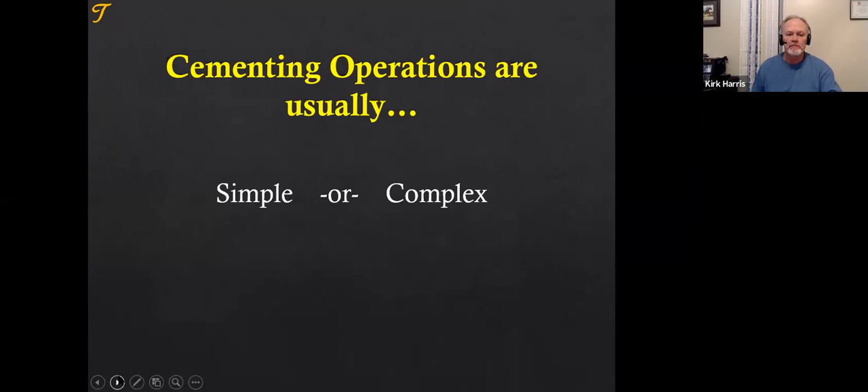When I was preparing for this webinar, we could do a 6-month webinar on operations. There is so much to choose from. It was difficult for me to determine what to focus on because this operation is complex. We're going to show some simplicity tonight, except it is complex. Usually, cementing operations are usually similar or different as you go around the world.

Vahid says different. Natalie goes with different. Not only are they different, they can be very different.

I've had the opportunity, I was looking at how many countries I've been on a cement job in. For those who don't know me, who haven't attended a webinar, my name is Kirk Harris. I worked for Halliburton for 23 years, then went to work for Occidental Petroleum as their global advisor, and then Talisman and Repsol as their global cementing advisor. I now consult in bond log interpretation, cementing consulting, a little training, and product development with our company Thuraban. We get on and talk every few weeks on our regular webinars.

When I started with Halliburton, I started as an engineer in training, but I quickly became a cementer and went out and used the equipment and cemented wells. I'm not speaking today from a theoretical standpoint. I was thinking as I went around the world, how many different countries did I cement in or supervise cementing operations on location. Although I've engineered in more than 40 or 50 countries, I've been on site in about 15 countries, from remote jungles or remote geothermal wells in northern Sumatra to deep water in Indonesia or the Gulf of Mexico, to downtown Los Angeles, cementing wells in the middle of a city.

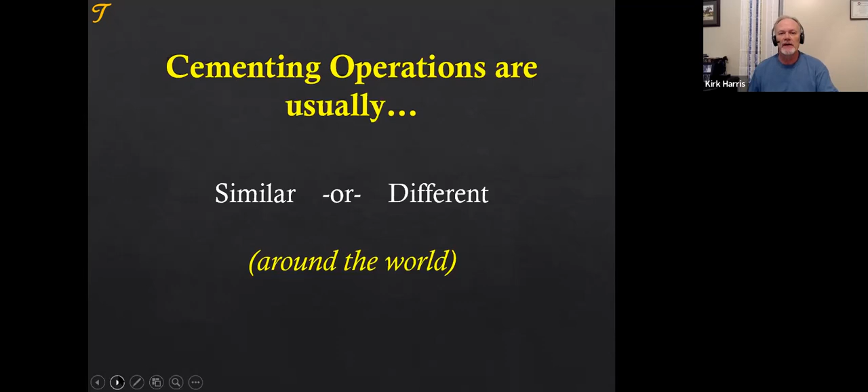Wherever you go around the world, from the Bass Strait of Australia to the West Texas area, it is different. That's so important, and we're going to talk about that - the local practices that are very important. As a global advisor, we put out global best practices, but those have to be refined and targeted for areas to get good cementing operations. So they're very different. I'm anxious to hear tonight some thoughts you have about how you do cementing operations in your area. And finally, cementing operations usually vary from place to place.

Are they getting better or getting worse?

Okay, Natalie says better, and we're going to have to believe her. I hope they are, I hope they are. Again, from area to area, both service company and operator do things differently. Some are better, some are worse. But generally speaking, with new technologies and lessons learned, hopefully we're getting better.

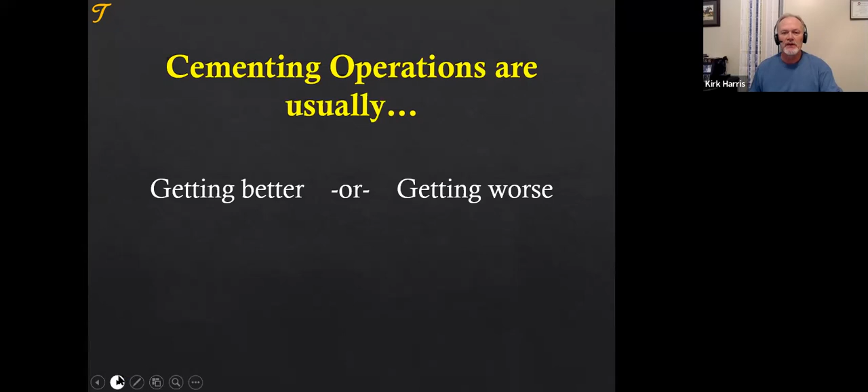Well, thank you for taking that quiz. The agenda for tonight: I'm going to give a short introduction about concerns - concerns that maybe you haven't thought of. I think about these, and some maybe you have thought of.

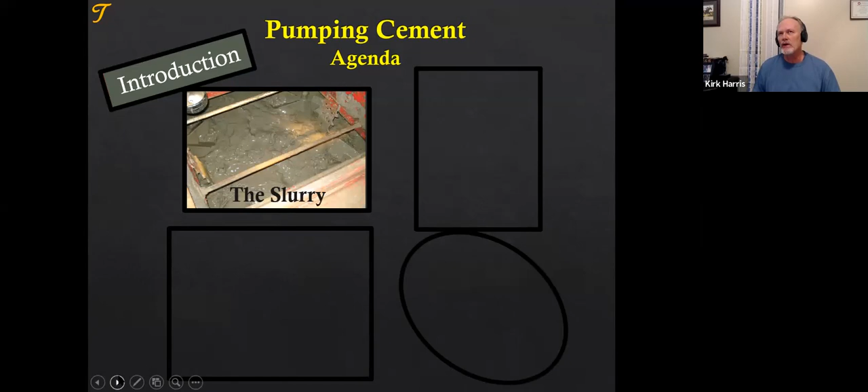I want to talk about 4 areas of pumping cement, and the concerns that you have. We'll talk a little general knowledge about each of these areas, and we'll focus on the major concerns. The first will be the cement slurry - the mixing of the slurry, the preparation of the slurry. On location, we want a quality slurry to be pumped down hole. Be thinking about what are my concerns when I go to a location about the slurry.

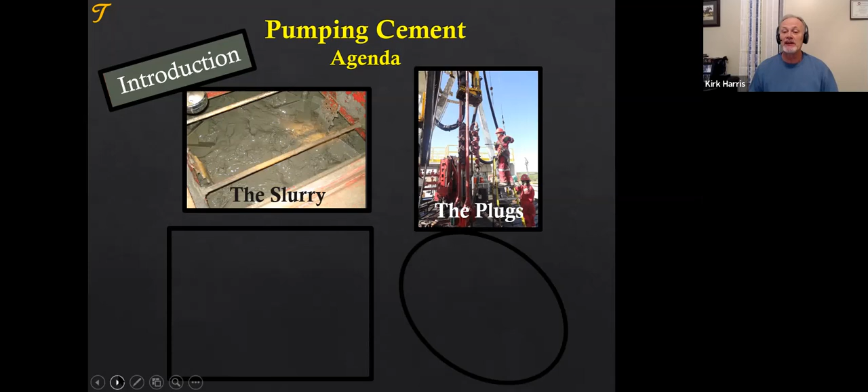Then we'll talk about the plugs. We pump slurry, usually preceded and followed by plugs, and there's a whole lot of things around the plugs that may give us concern.

The equipment - we place that slurry at high pressures and displace it at high pressures. We use a variety of equipment, both on and off location for the operation. As we prepare and go to location, what are your concerns about equipment?

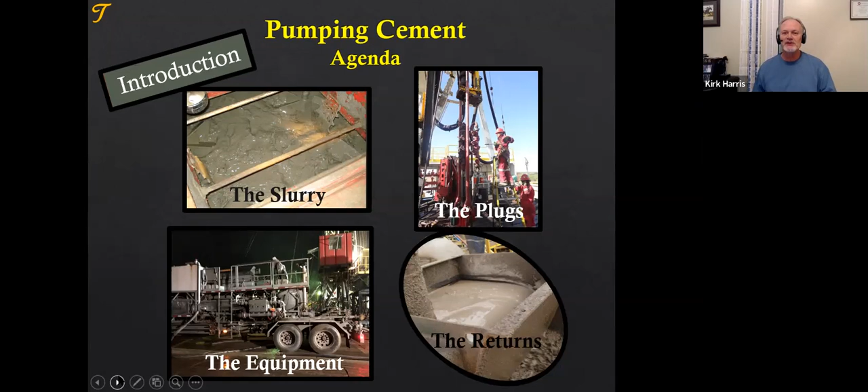And then finally, an area that I like to spend time with - the returns. I've got a terrible story to tell about the most recent cement job I was on. I'll just say in short, we got a lot of cement in the mud tanks, and that's not good. We brought the expert on location so we could fill a mud tank with cement. I'm going to make this story very short, and maybe throughout the webinar I'll even forget to tell it, and that will be good. But what are your concerns about the returns besides pumping that cement into the mud tank?

Another question: in a line or two, what separates a good operation from a bad operation? We're thinking cementing. My other passion is horse racing - I train race horses, and I've talked about this quite often: what is the difference between a good horse racing operation and a poor horse racing operation? The same, I see it with cementing operations. In a line or two, in a word or two,

what separates a good operation from a bad operation?

I'm looking for the answers, and I hope you're joining me with your cup of coffee. As an aside, I was watching someone give a presentation on TV the other day and they kept drinking their coffee, and it actually annoyed me a little bit. I thought maybe I better stop drinking coffee, so I didn't drink coffee this morning. Someone said, we want to see you drink coffee. So I'm going to drink my coffee, but I realize it may annoy someone, because if I were you it would annoy me. I'm giving you the chance to answer the question while I sip my coffee.

Now, it says to provide zone isolation. Yes, but as a company, just as a company, getting out there and being able to pump the cement to do that.

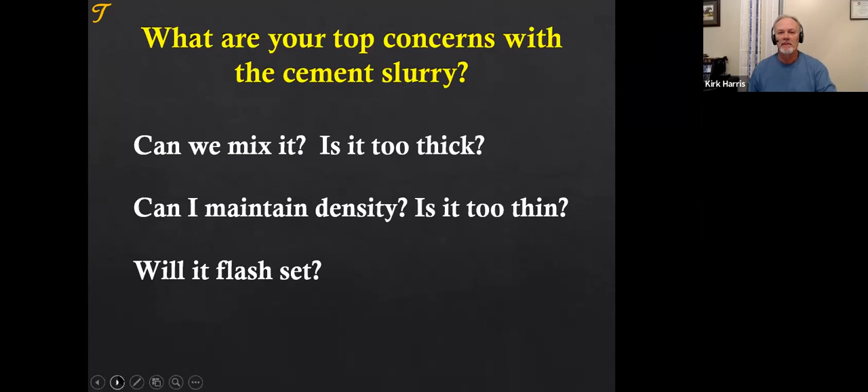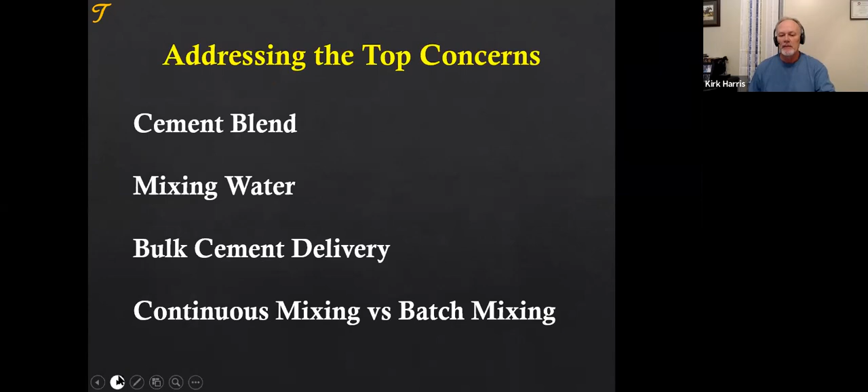So as we address the slurry and the big concerns, it starts here. It starts with the cement blend, then we look at the mixing water, the delivery, and then we'll talk about continuous versus batch mixing. But it does start here, far from location, in a place near and dear to my heart.

It is the bulk barn. This is where I started. This was my first duty when I started for Halliburton. My first job was to cut sacks of additives, put them in the hopper, open the valve, and allow the vacuum to put them and layer them on top of cement in the scale tank as I prepared the blend to go to location.

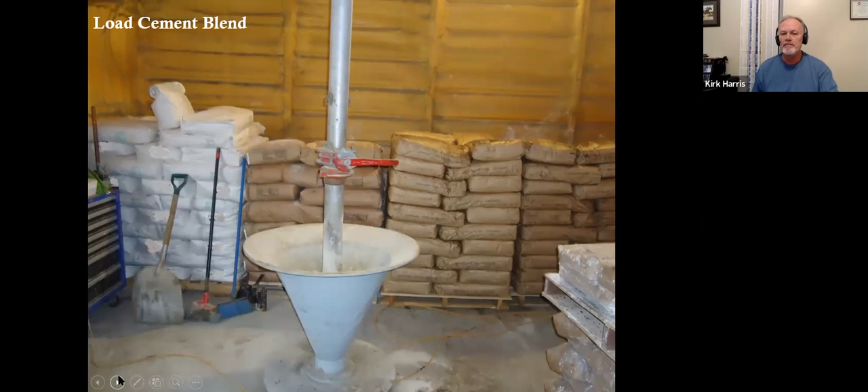Here we have preparing the blend into the hopper. This is a super sack. I think it's 1,000 pounds of hollow spheres, cenospheres, hollow pozzolanic spheres. You can see where it's made.

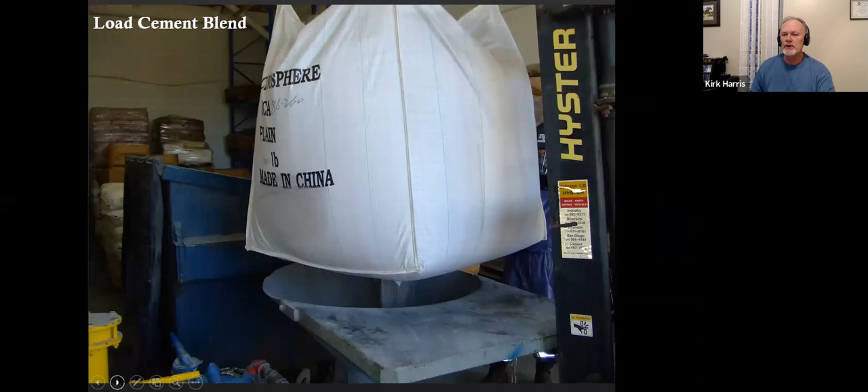Those go into the hopper. They're blown into a scale tank. We put the cement into the scale tank. We layer cement, then additives, cement, additives, cement into the scale tank. We weigh it out. We then blow it back and forth. 1, 2, 3, and 4 goes to the truck.

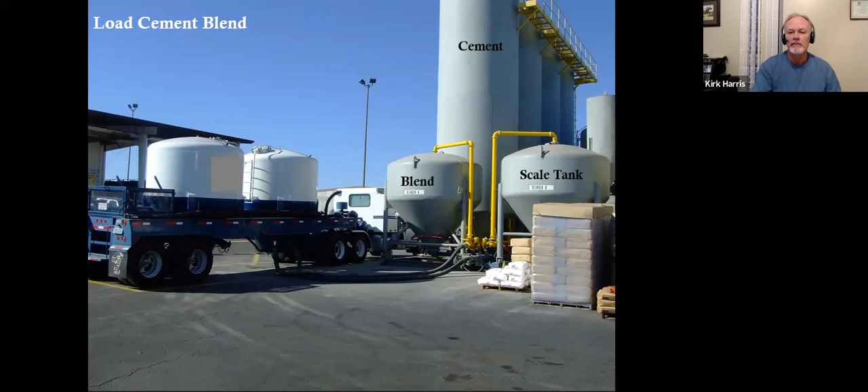We'll have to do this several times to fill a truck or on location to fill a silo. While we're doing that, as it goes to the truck, we're going to catch a sample. We have an automatic sampler that takes the sample out of the middle of the stream of cement as it's pneumatically transferred to the truck.

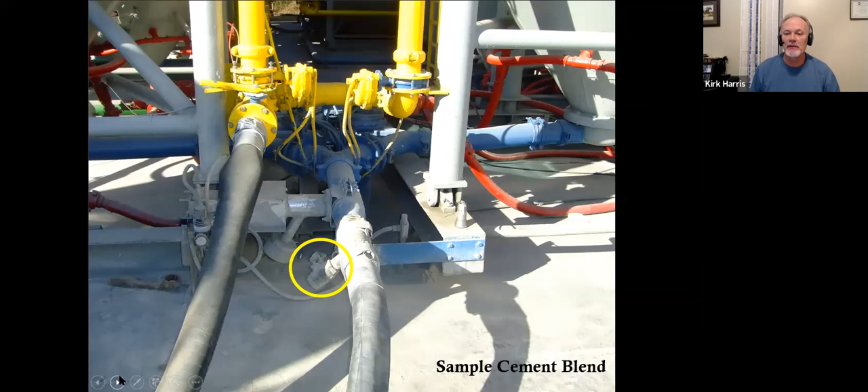On this particular day, actually, the sampler was not working. I don't know how long it had not been working. And so there's a ball valve there where you may be catching a sample, representative or not, it's a sample. We're going to take that sample in a plastic bag, store it, and keep an eye on it. And we're going to run a blend test with some of it.

When we run a blend test, I'm not sure how you run it, but I know a blend test is run differently all over the world, because it's some task to test every single batch, since it takes several to fill a truck or a bin. Sometimes we sample every one and test every one. I know some operations that do that, and it is attention to detail, but boy, is it a lot of work. And it ties up the lab.

You can take it from just one load. I don't know what good that does you. It does you some good, but with one load, you take the sample, you could mess up all the other loads and it'd be a disaster and you'd never know it. That's happened to me before.

Or you can take a little bit from each load and do a composite blend test. Often we'll do thickening time tests, so we're talking more than 4 hours where we're waiting. The bulk truck sits in the yard. We've had, in busy times, traffic jams in the yard because we're just waiting on blend tests, causing all sorts of logistics troubles.

Or some service companies had the idea, I don't know if it's good or bad, to be honest, and that is: send the truck to location, and we also send liquid retarder, and we make sure that we design with not enough retarder, and then we add liquid retarder and adjust it during our blend test. I know one region that does that all the time. They sell a lot of liquid retarder. I think they run a lot of liquid retarder. That's my concern.

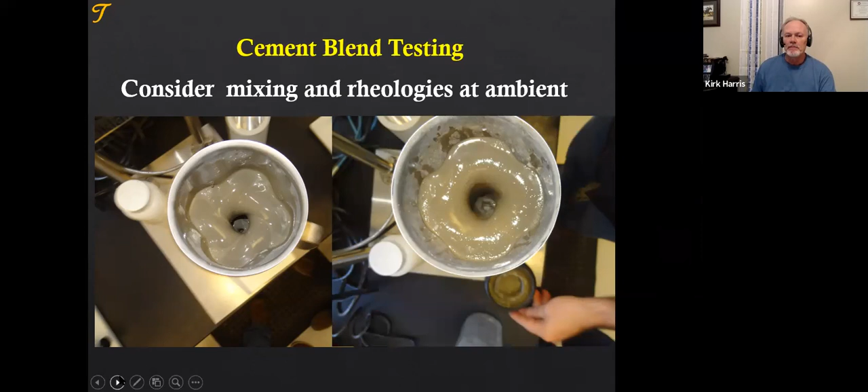Often when you have something wrong, it will show up in the viscosity. So they mix it, and you can tell on the right what's a pretty good cement. The blend test, we're getting all sorts of lumps and problems. So we know something's wrong and we can check it out there.

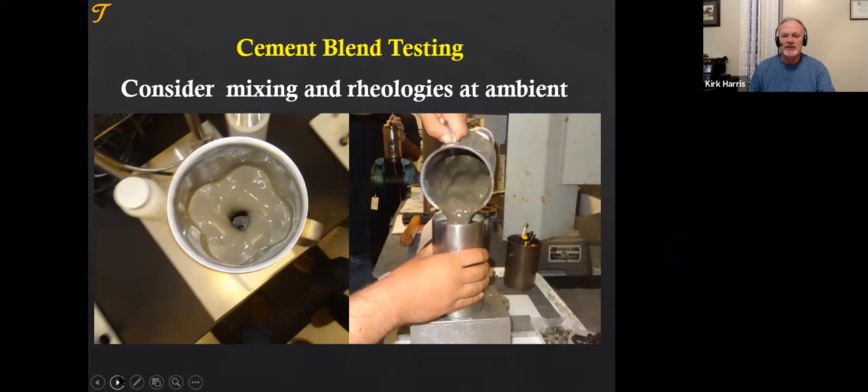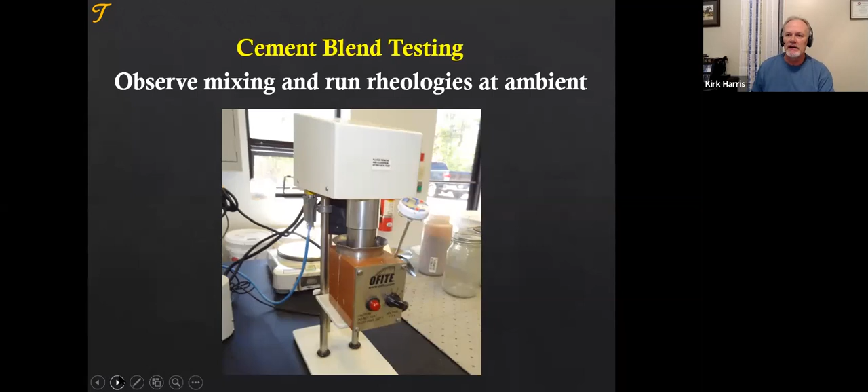And we need to gather that either as we transfer to the boat or as we go out and get the cement, bring the cement in from the rig. Because sometimes the cement's sitting out there for a long time and it can cause some big problems.

Understand again, we do it differently everywhere. In the Gulf of Mexico, we will have dry additives and liquid additives, but a lot of dry additives mixed in the cement that goes onto the boat at times. In the North Sea, all around the world, mainly the only blends we put out there are silica flour blends. And then we have neat cement, and all additives that we use are in liquid form.

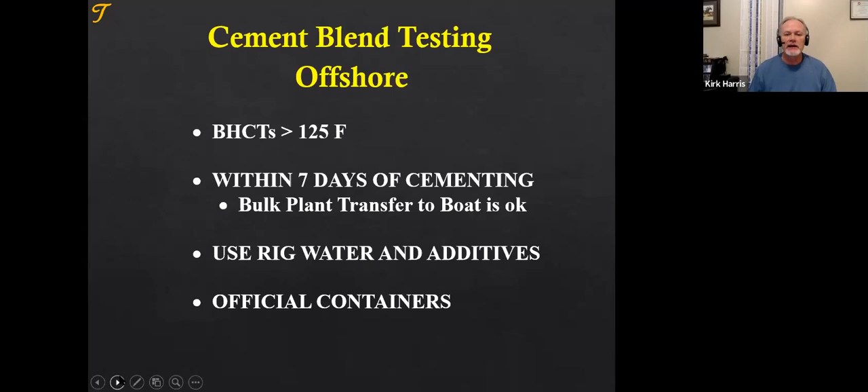The mixed water, someone mentioned that. Once again, it's very local. In the north, in cold weather, we have to heat the water. Cold water makes very viscous, difficult to mix cement. I put 70 to 80 degrees for one region. We had it narrowed. We're going to heat the water between 70 and 75.

In West Texas in the summer, some people use less than 90. I'll use less than 95. We don't want the water to be too hot. We did a major study which showed that it only affects accelerated slurries. So if you have a slurry with retarder, the water can be hotter than that and you're okay. You don't have to shut down the job, but water temperature is the main concern.

We test chlorides, we want them less than 3,000. Above that, we see the acceleration of the cement. We'll check pH, we'll check specific gravity, dissolved solids, sulfates, and some other properties as well. From region to region, we test different things. But these are the main ones.

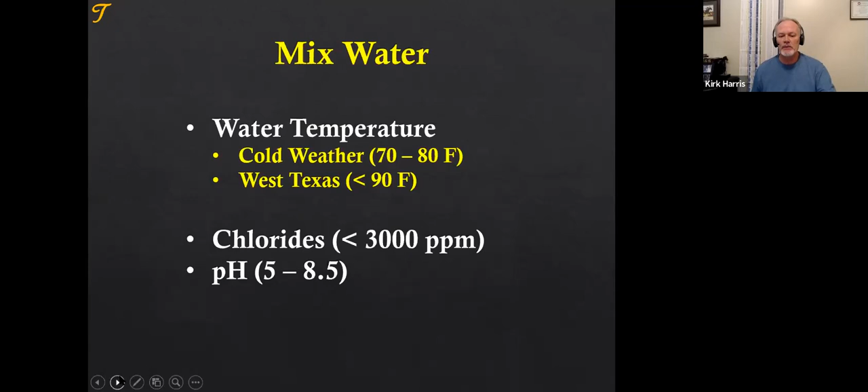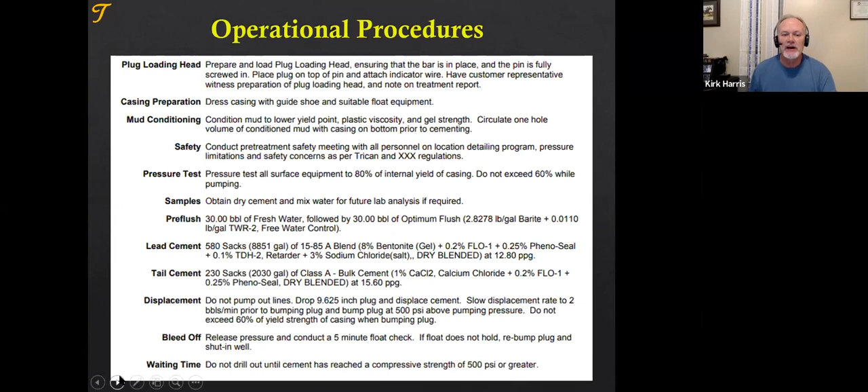I'm going to skip, but we are doing calculations. We are looking at our operational procedures. I hope they are more detailed, and I hope they're a partnership between the operator and the service company. We covered this in our first webinar, so I'm going to move through that, and let's go right to location.

That bulk truck is now on location. We have our water truck there to the left, the black water truck. And I don't know who the blue is. There's a few blue companies, so you don't know who this is. You'll notice that we have a ball valve and we're transferring pneumatically the cement through the hose to the cement truck. We're going to take a sample here as well.

We're on a job where we're supposed to mix the cement at 16.4 ppg. On location, we couldn't get above 14 ppg. We had to abandon the job, and fortunately, we took a sample of the cement from the ball valve. When we got the sample, it was brought into a lab in New Mexico, and I looked at the sample and I said, wow, this isn't our cement.

It had lost circulation material in it. We didn't order lost circulation material. And it was very evident to see little pieces of plastic were in the cement. So we went and said, you loaded the wrong cement. And they said, no, we did not. Here's our cement that we loaded. I said, well, you had contamination in your truck. No, we did not. We checked it. It was clean. And I believed them. Where did the lost circulation material come from?

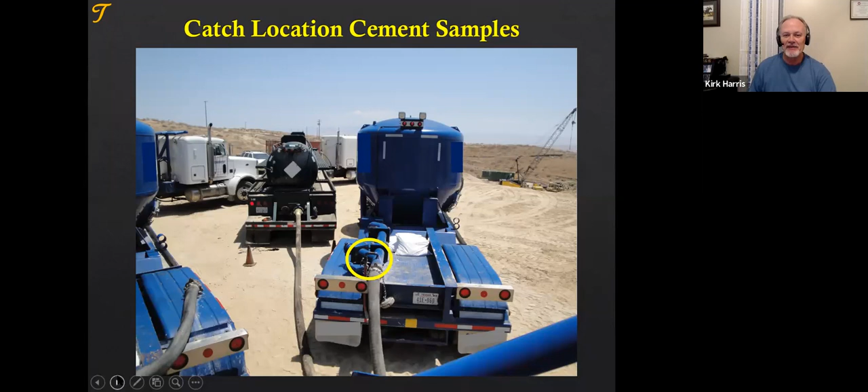That's why we need to sample on location. That's one reason why. Some service companies have taken away the valves to sample. So if nothing else, reach in and grab some out of the line, get some evidence just in case things happen.

Here's where the cement goes to. There, the valve on the left, you see dry cement going in. For all of those big red fans, this is not a Halliburton cement head, this is a different company. Dry cement goes in, you see the H2O. It will be in a jet form, either axial or rotating, and it will wet the cement and it will fall into the mixing tub.

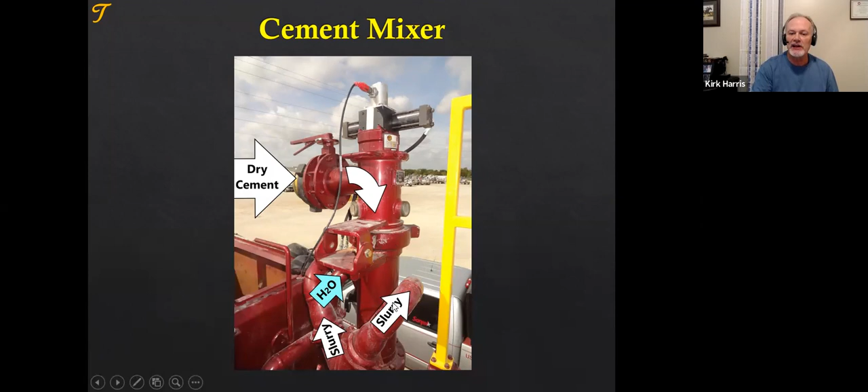Here's where the energy occurs. It then goes into a containment and it is recirculated. So you see the slurry coming back in. So all at one time, you have dry cement, you have water jet, and you have recirculated slurry. And we end up with the mixing tub. I'm not saying this is pretty cement, but it is gray.

On the left side over here, that's the pre-mix side. This is where we're going downhole. We have agitation. And this is where we look and see, is that quality slurry, can it be mixed or is it too thin? If you ever have a thermometer as well, it's pretty handy. Sometimes you can kind of touch it, be careful, to see if it's warm.

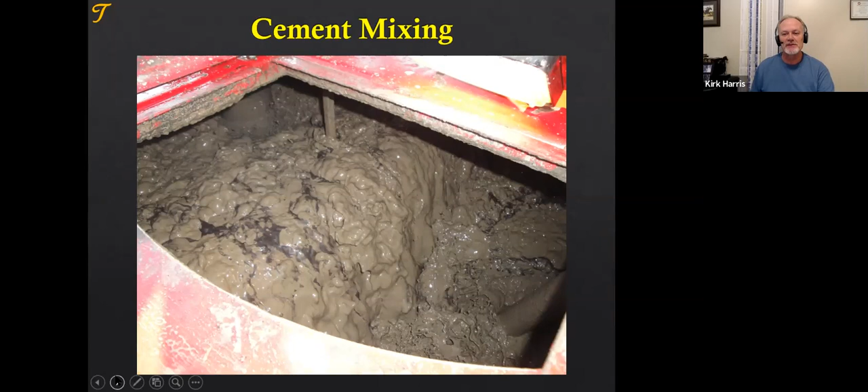I've been on operations where we've pumped some very hot cements and I've been very curious about that. Here we are mixing some more cement. This is pretty close to downtown Los Angeles. We're mixing cement here in the tub. We're going to confirm density.

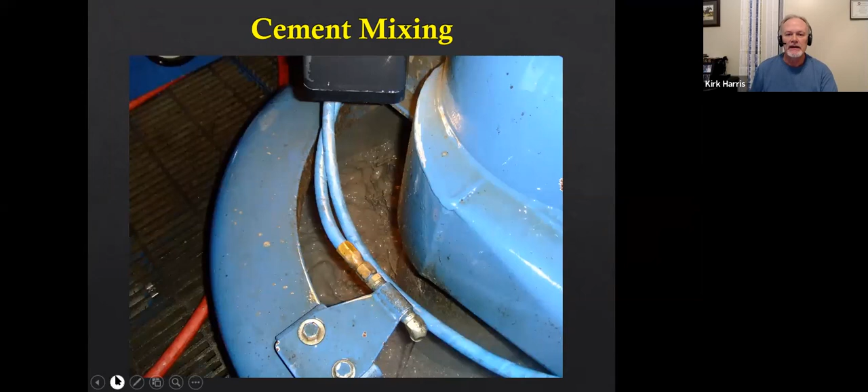Once again, the last job I was on, we did not confirm density. I was going a little crazy. But at the beginning, in the middle, and at the end of a continuous mix, we'll check the density. It's easy to get the cement up to density, check it.

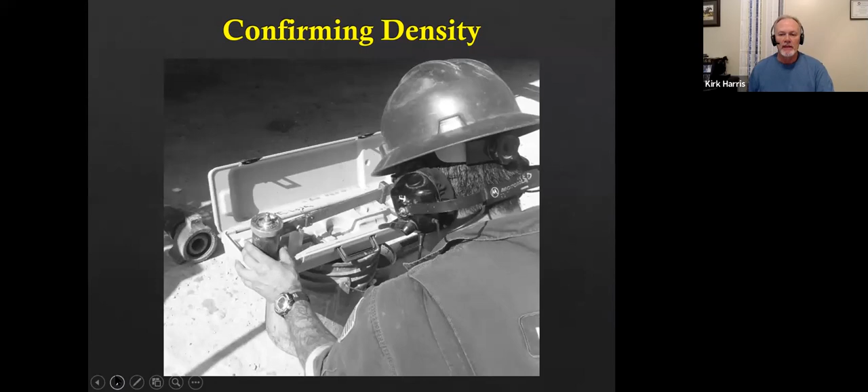We calibrate our densometer at that time and then just trust the densometer. But we want to see it at various points while we're mixing, confirming that our density is correct. We also check it electronically with the densometer. You can see here the density. We want it to be uniform.

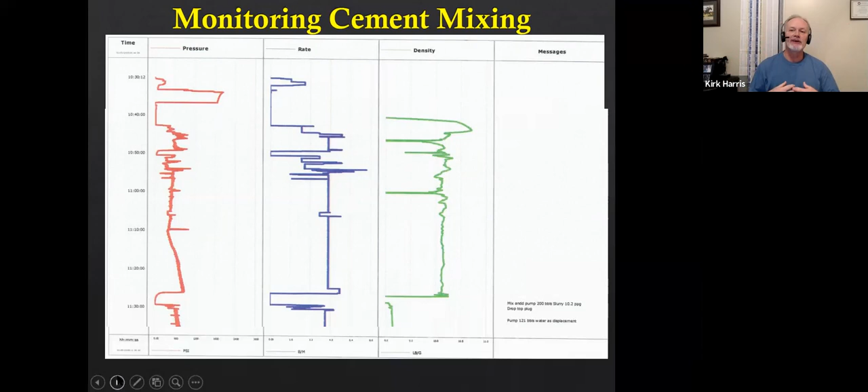The cause for that so often is getting cement to the unit. Once you start having problems packing off, or you're having problems getting delivery, it continues as an issue. These bulk trailers have aeration pads on the bottom, and we fluff the cement. We aerate the cement before each job to get it to flow, but it can still pack off. You can still get surges of air, which cause problems. I think you can see a surge of air here, a surge of air.

And we have someone tending that bulk truck, the bulk driver. What is he doing during the job? What is he continuously doing? Someone this morning said taking it easy, but he is not taking it easy. What is he doing? He will be opening and closing the valves as we go from pod to pod of cement, or from silo to silo.

What else is he doing continuously? It's a skill, I don't think I'm good at this skill. What is he doing? I'll give you a few seconds to answer. He is opening and closing valves, but what else is he doing? If you're on the cement job watching him, we have a compressor that's running continuously, keeping a constant pressure. He's looking at that pressure.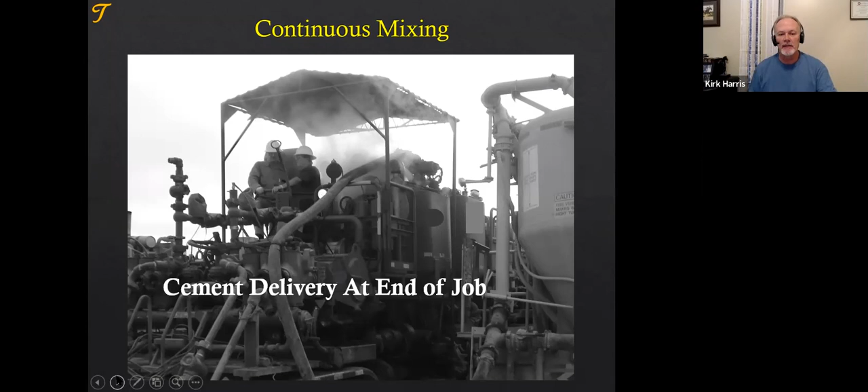For those reasons, we often will batch mix. I work for someone right now and I agree with him, because he's been on so many jobs and he cannot get a good continuous mixed job. Go back to whether things are getting better or worse. And so he will batch mix all tail cements and all critical cements.

Batch mixing, instead of mixing on the fly where our retention is about 8 barrels, and as we're mixing, it's being pumped down hole. Batch mixing, we mix all of the cement before we start pumping it down hole, and we keep it in these containers. This is a 250-barrel container, or 100-barrel batch mixer, so we can mix.

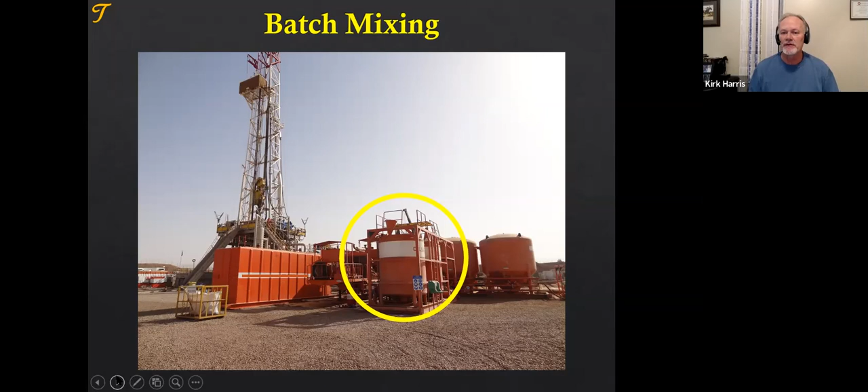And here we have some beautiful cement in the batch mixer. I remember this job, this is actually beautiful cement being pumped in Oman.

Now, what are some concerns about batch mixing? First of all, what is a good concern? What is good about batch mixing? Why do we love batch mixing? I know we don't have to worry about the way it mixes, but what does it give us?

Natalie mentions considering the effects of batch mixing on thickening time. We simulate it in the lab, I'm not sure it really counts so much as we simulate it in the lab. But what are we trying to get out of batch mixing? Exactly, we're trying to get a uniform, constant density slurry. We don't worry about it here, it's a beautiful slurry, let's pump it down hole. Much better control of the density. What is the concern about batch mixing that you need to be aware of?

I don't know if for any of you, this is the first webinar you've attended, but you're saying, man, he asks a lot of questions. Doesn't he know anything?

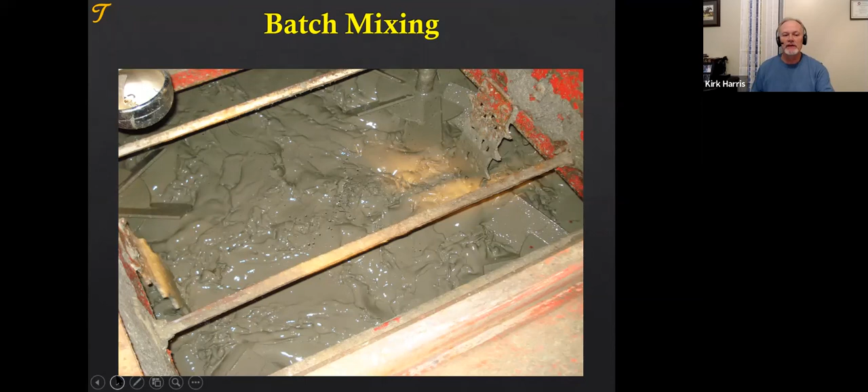Here are some other concerns, these are good points. Here's a big one, and that is fast setting cement. I don't know how many batch mixers I've been involved with that I've cemented up, but it's been quite a bit. I was sent a picture from the North Sea of a batch mixer where a cutting torch had taken off a side of the wall, and carved in the cement were the initials of our field engineer. He sent it and said, thanks a lot for the design recommendation, Kirk. And here's a beautiful picture of a cemented up batch mixer. The problem is you can get friction and heat retention.

Cements are exothermic reactions, but if you get heat in the cement with a large mass, it can get pretty hot if you have an accelerated slurry or friction involved. Heat retention in large volumes, I don't think we mimic that well in the lab, is an issue. Large jobs we have 100-barrel tanks. If you're going to put 2 or 3 batch mixers out there, the footprint and the cost are involved.

So we usually use it only for small volumes of fluid. Although for the large volume jobs, we do this for hollow sphere cements. You can use it as an averaging tank: fill up 50 or 100 barrels of cement, pump that down hole, and while you're pumping down hole, you continuously mix into the batch mixer.

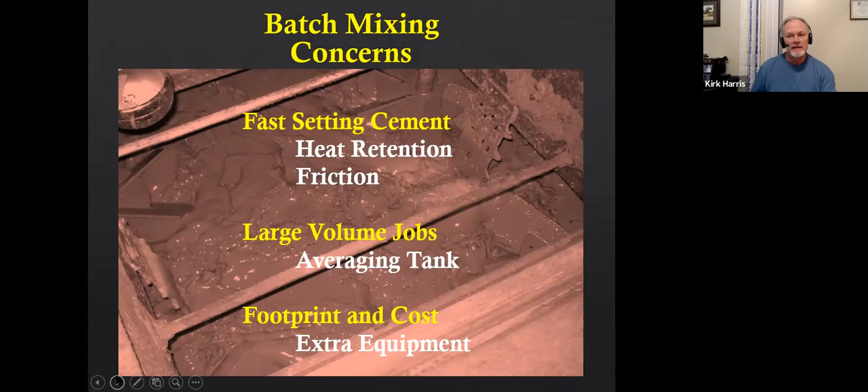We'll move to the plugs. My question to you, another question: what are your top concerns with cement plugs? Again, the big concerns when you go on location, when you're dropping plugs, we'll look very quickly at the basics of dropping plugs, and then we'll look at some more cutting edge technology.

What are your top concerns with the cement plugs? You're on location, you want things to go well, that you have the right plugs, the depth, where do I have to pump these plugs. But what are your top concerns? Usually my top concerns are what can go wrong. I want things to go right. What can go wrong here?

That you have the right size of the plugs. Do I have the plugs on? Now listen, do we even have any plugs on location? That concern usually is quickly alleviated, but sounds like a bad experience there not having the plugs on location.

Yeah, do I have the right plugs? I look at it this way: will the bottom plug open? Was that bottom plug actually a top plug? If it's a top plug, we're in big trouble. If you ever have had, and I have, the bottom plug not open... I've had subsea release bottom plugs, and subsea release plugs are a whole nother issue. We'll look at that a little bit.

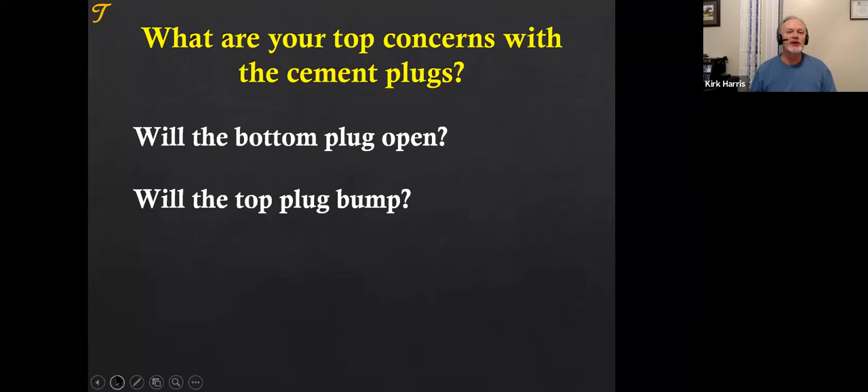Just a little bit until we tag the next day and find out where that cement is.

Here's one of my concerns. I remember the first time I had to go up and stab a cement head about 25 feet up in an ice storm. I remember how long it took me to climb up the ladder with no safety harness. We didn't use safety harnesses there. We climbed up in the sky trying to stab difficult to stab cement heads. So I'll say it maybe one more time: maybe things are getting better.

In the cementing world it used to be much more dangerous. But how much trouble will we have stabbing the cement head? Because after we circulate, sometimes we'll put the cement head on and circulate some more, sometimes we won't, and we'll do the cement job. How long does it take? When I'm on location, I don't like waiting while we try to get this operation going while the mud is static. We want to circulate and very quickly then cement.

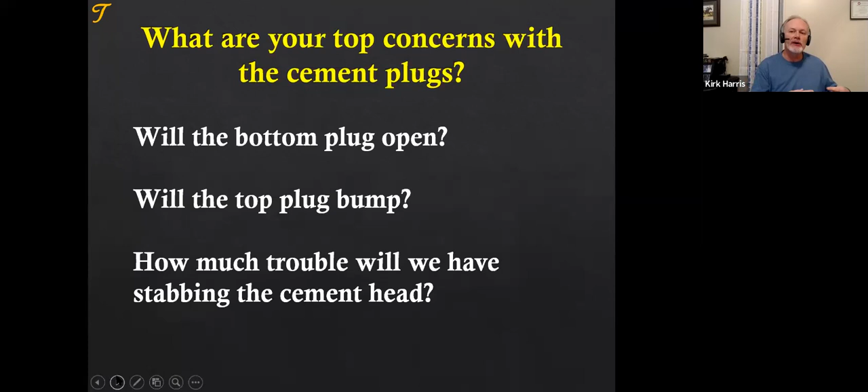Let's look at plugs very quickly. To the right is the top plug, a solid plug. To the left, usually red, not always. A little side bit of information: the color of the rubber is actually, I believe, red. We have to color them to make them black. I didn't know if you knew that.

But the bottom plug, that top disc will burst, this particular plug at about 250 PSI. So when it lands, it bursts and we cement right through the middle of the plug. When the top plug lands, it is over, the job is displaced. This is what we use on long laterals in unconventional wells. We use this quite effectively. A key there is to make sure you clean the casing all the way out.

When we complete the well, we want to circulate all of the debris out of the well, dynamically settled barite or cement, and we would circulate a bunch of trash or debris out of the well. When we went to using two bottom plugs and this top omega plug, a regular plug, but then a large wiping ball on top of it, we got very good results.

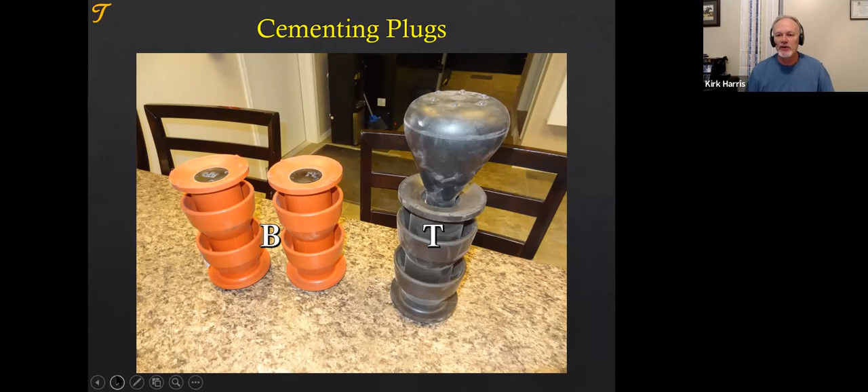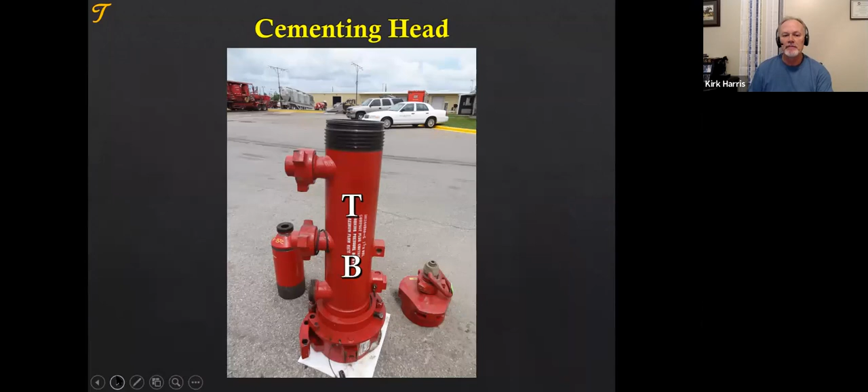Here's the cement head that we will put the plugs into, the top plug T and the bottom plug B. You can look down in that cement head and see our bottom plungers that will retract to release the plugs. So we have our top and bottom plug.

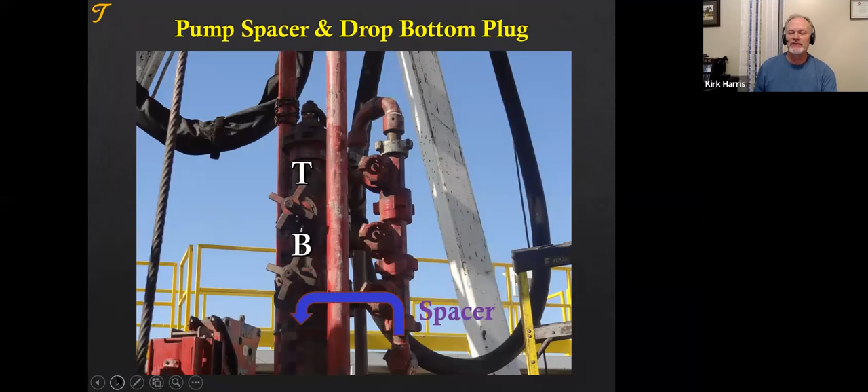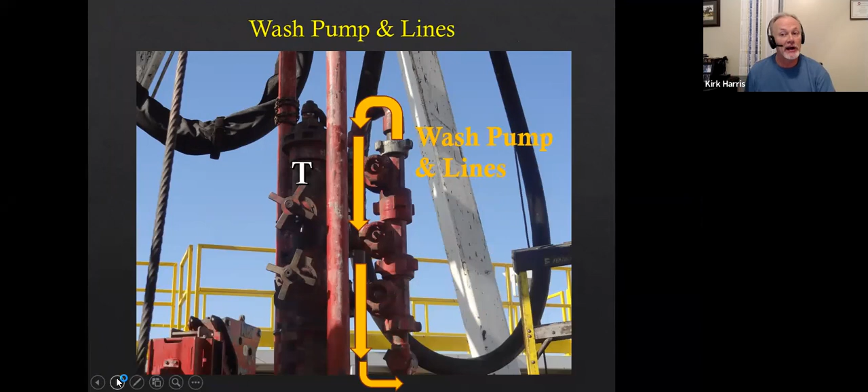We'll pump our spacer through this double plug container cement head. We'll then launch the bottom plug with cement, pump all of our cement for a production job. We'll wash the pumping lines to make sure that we don't get too much cement on top of the production top plug. And then we'll displace and launch our top plug and displace until it bumps on the collar.

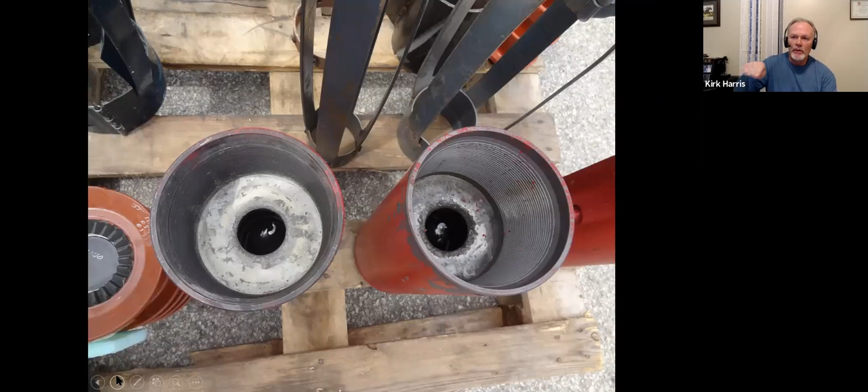We kind of introduced cementing through the top drive. Many years ago, we used to cement through the top drive and we would drop the plugs by hand, and oh, do I have some stories to tell about the dangers of dropping plugs by hand in the middle of a cement job. This is another way, as we cement through the top drive, also with the casing running tool and a swivel where we can quickly run the casing. We'll be able to rotate while we cement and we launch plugs.

I think the only jobs for this plug launcher so far have been in Australia, the case histories are in Australia. There are other systems like this, but I wanted to present to you some new technology, and this kind of stuff to me, I like this quite a bit. So let me show it to you.

First of all, let me quiz you: can you see on your screen the Volant plug launcher? I don't want to show you it and then you tell me we don't see anything. Okay, great, I'll hit play. Let me first add a little sound and a little optimization, and away we will go. Okay, we'll just take a look, I think you'll be able to see it.

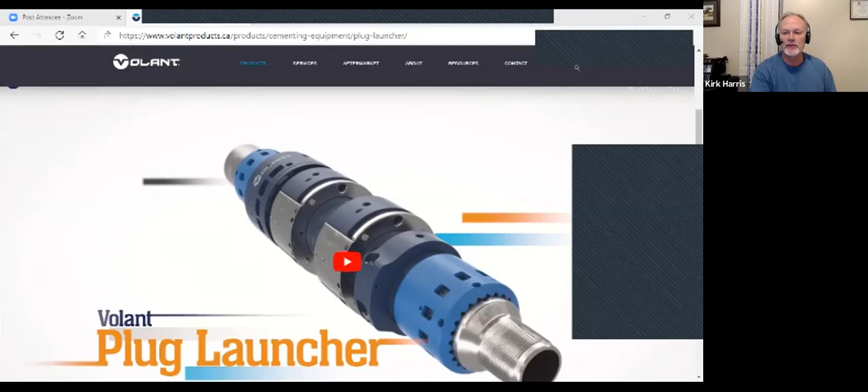Well construction just got simpler. Improve your long-term well integrity and reduce the flat time between landing casing and cementing with the Volant paddle valve plug launcher. Volant's paddle valve plug launcher enables a worry-free plug release through its remote pneumatic control system.

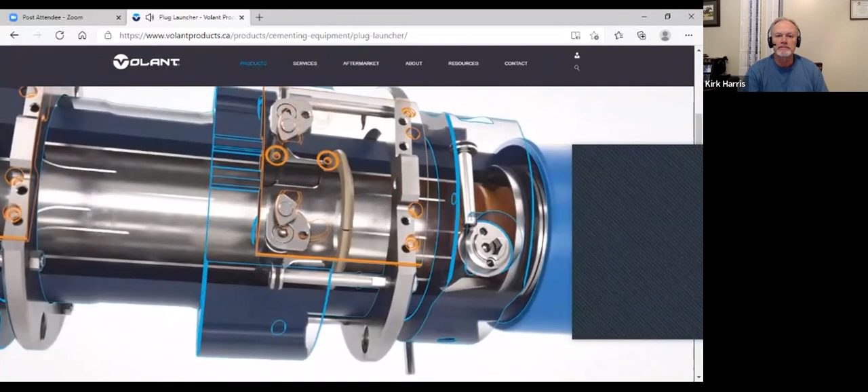While in the ready-to-launch position, flow is diverted around the plugs through the tube bypass. When launched, the paddles drop, blocking the bypass and diverting flow to the top of the plug, ensuring a positive launch every time. A launch indicator is triggered by the passing plug and is reset from the pneumatic controls on the rig floor.

While the interlock on the control panel ensures plugs are released in the correct sequence. When combined with a CRT and cement swivel, operations are further enhanced by achieving continuous rotation, reciprocation, and a more uniform cement distribution. Simplify operations and improve long-term well integrity with the revolutionary Volant plug launcher.

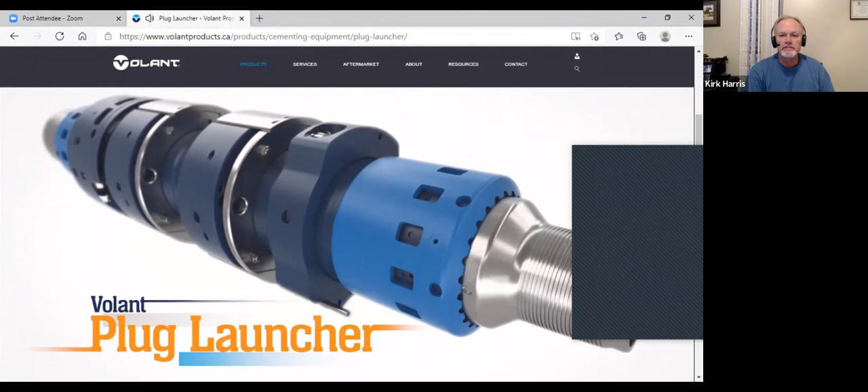The plug launcher and that sort of operation, again, we used similar type systems so that we could rotate, but that we could do things quickly. I think you'll see more about this tool in the future, in some of the case histories. Again, I have no relationship with Volant, but I like this kind of technology. I would state to anyone who has new technologies during our webinars, if you're willing to let me show it, I know a lot of our participants want to see cutting edge and what's going on out in the field. So thank you to Volant for allowing me to show that equipment.

What are your top concerns with the cementing equipment? Your big concerns. I'm thinking when I was at Oxy and we talked about the whole equipment thing, I think of big concerns that always came up. What are your concerns with the cementing equipment from an operations standpoint? Mohammed says the float, and we're going to look at that a bit, but now we're looking at the casing equipment, which is cementing equipment. What about the actual pumping equipment?

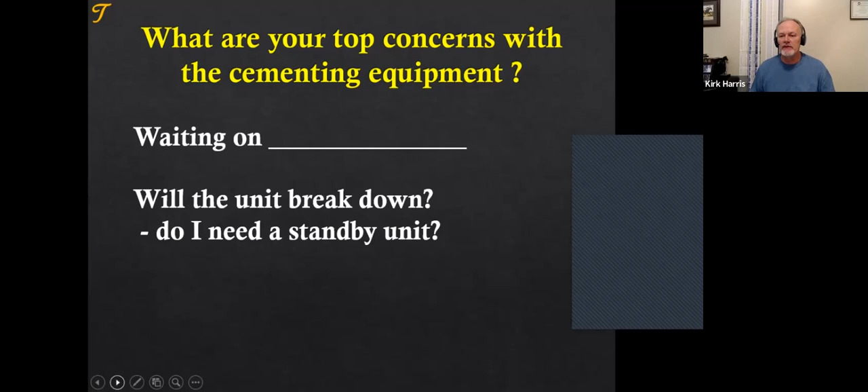Safety is a big issue. We're always looking, making sure we pressure test, but making sure the lines are secure. We're looking at things - do things look right and safe? We're looking for leaks.

For me, you always think you're about 26 years old. So I go out to location, and I'm finding the 6th time I climb up some of these ladders on the cement units, I just stay up on the truck. I don't want to take that adventure. Do not take for granted the ease at which you climb onto a cementing unit at your young age.

That has something to do with why we cemented up some mud tanks, okay? It's a long way the 6th time down to get off the truck and go over and supervise the cement returns.

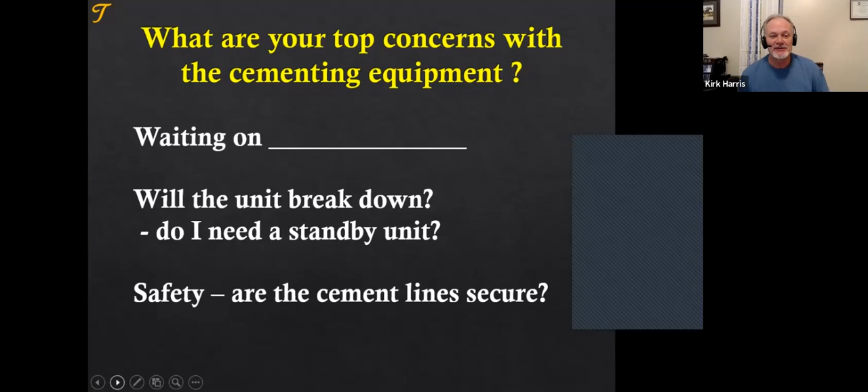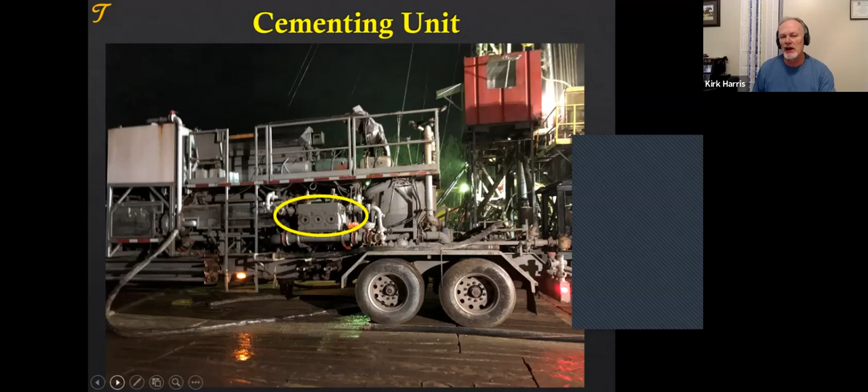We will then, once we've pumped the cement and dropped those plugs, displace with the cementing unit or the rig pump. Offshore, it's usually the rig pump. On land, it's almost always the cementing unit.

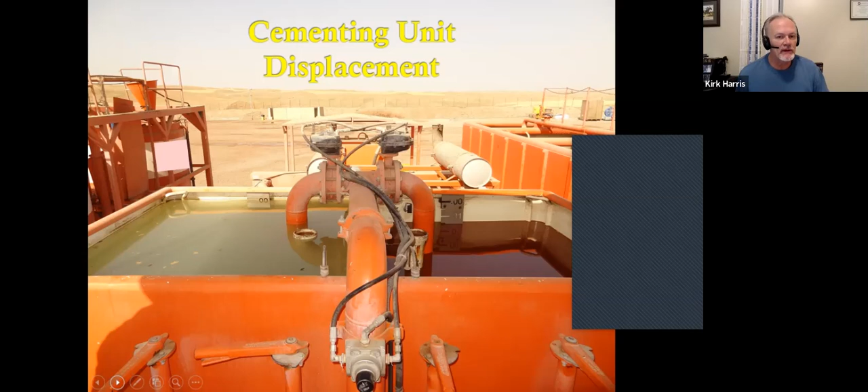We'll measure that displacement, usually in 10-barrel containers. We'll fill one while we're pumping the other down, then fill the other, counting the barrels. We also have a counter with the drive shaft, a barrel counter, kind of like the strokes for a rig pump.

And we're going to bump the plug. I kind of made a joke - sometimes sense of humor does not work well. If you go to an SPE meeting, a serious SPE meeting, humor does not work at all. It has always failed me. Just go to an SPE meeting and be serious, just the facts.

But I kind of made a joke on LinkedIn. I said, can we bump the plug at 14 barrels per minute? And someone said, you cannot, you need to slow down. And we do need to slow down to bump the plug. But trust me, you can bump a plug at 14 barrels a minute. I know you can - it's an interesting thing to do. You don't want to do it, but you can. We want to slow down to land that plug.

We'll bump at 500 psi generally over circulating pressure and hold it for 5 minutes.

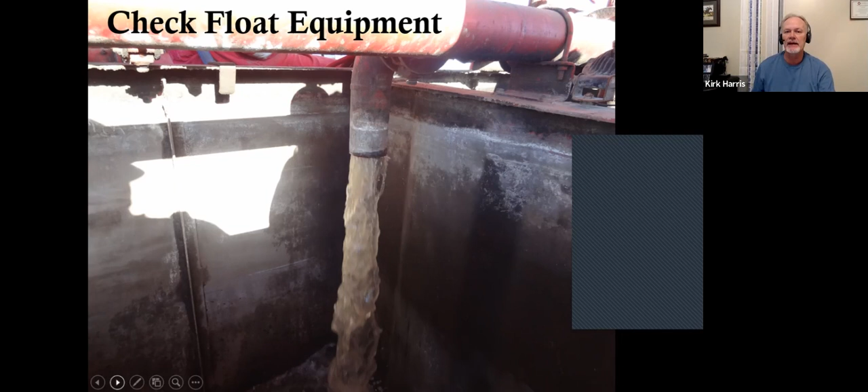We then will check the float. We have pressure trapped on the inside of the casing from lifting the cement, which can now not come back in because of that check valve. But if the check valve fails, all of the displacement fluid will start flowing back. So we'll check the float - it starts to flow, but then it stops and we are happy. If it doesn't stop and it starts to flow, we may let it flow strong and slam it shut, then open it again fast, trying to jar the float valve to seal.

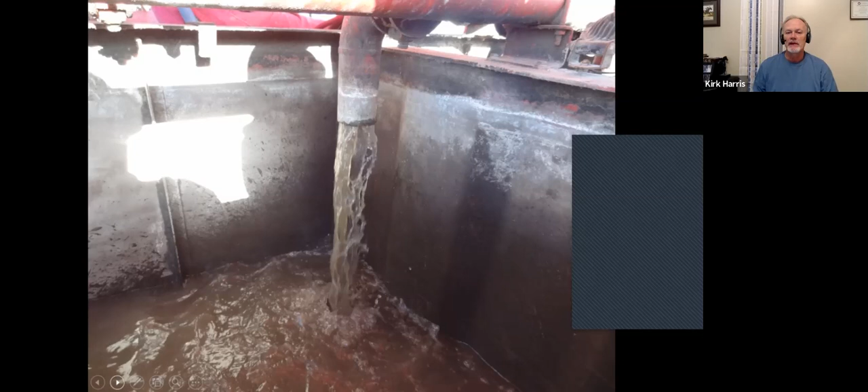Something I do not do, now our floats have held so we're good, but something I do not do when the floats haven't held, that everyone does - so everyone is probably right - is to re-bump that plug. We often just let that plug stay where it ended up. I never liked pumping back and perhaps bypassing plugs, I just didn't like pumping back on a plug, but everyone does it and it's probably the right thing to do. I just never have.

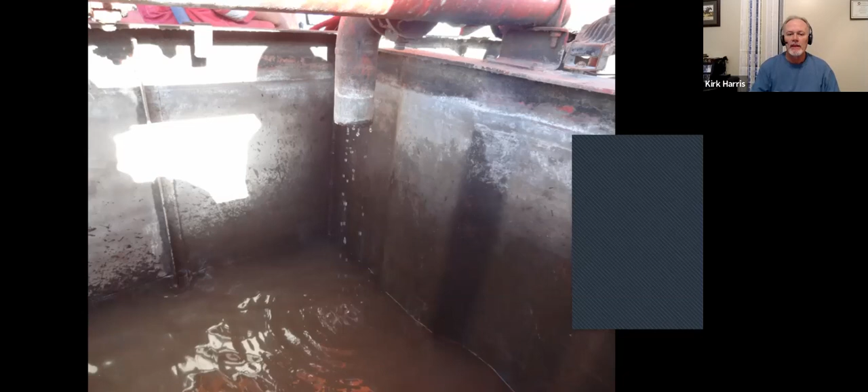How much should you flow back? If you know your operation, you know exactly what you should flow back in certain fields, every time. With water, we're going to get 5.5 barrels back. With compressibility factors, it's going to change with oil-based muds, different densities and pressures, but you can calculate that.

Finally, the returns - we got everything pumped. While we're pumping though, we're watching returns. You may want cement returns to surface - they may not be part of the design. Either way, we're watching the returns.

What are your top concerns with the returns? What are your big concerns? We'll look at this and then quickly look at cementing up the pipe and we will be finished. We've got about 13 more minutes left. So what are your concerns with the returns?

How much cement did you get back? What are your concerns about the volume, Mohammed? You may want to know them, but what we want to know is if we have cement returns, Nicole says. Natalie talks about knowing the density of the returns.

When we don't have cement returns, our mud is being circulated into the mud pits. When we have cement returns, we direct it into a waste pit, a disposal tank, or a waste tank, and we add sugar to it to keep it liquid, and we will dispose of that. We do not want the cement in the mud tanks.

Even worse, with oil-based muds, we don't want the surfactant spacers contaminating and killing the good oil-based mud. So we need to know if we get cement returns to surface.

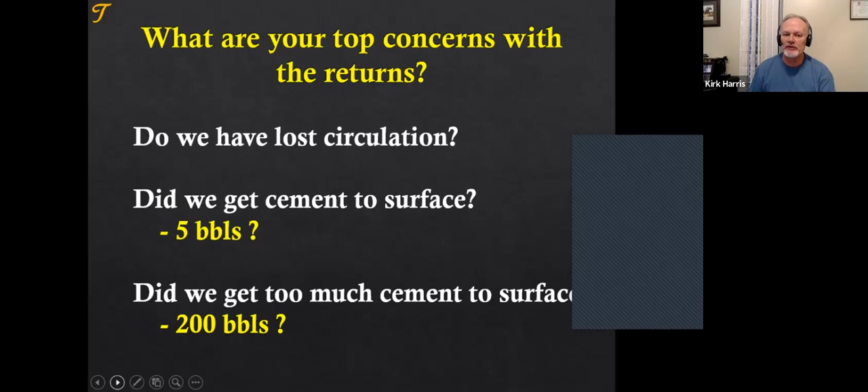Now, I can't smell very well, so I can't smell it, but I really don't use my nose to look at cement returns. I know a company man who can smell cement from across the other side of location. He will tell you when you have returns if the wind is just right. He tells me it smells like bubble gum. We're getting cement returns. I was never good at that. But we can observe the appearance, a viscosity change, and a smell.

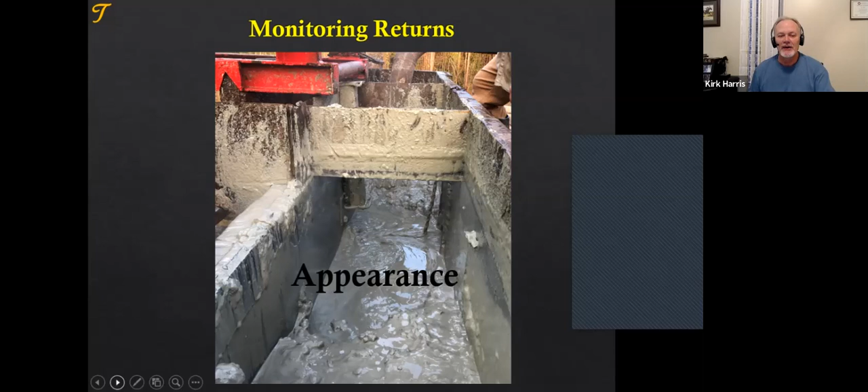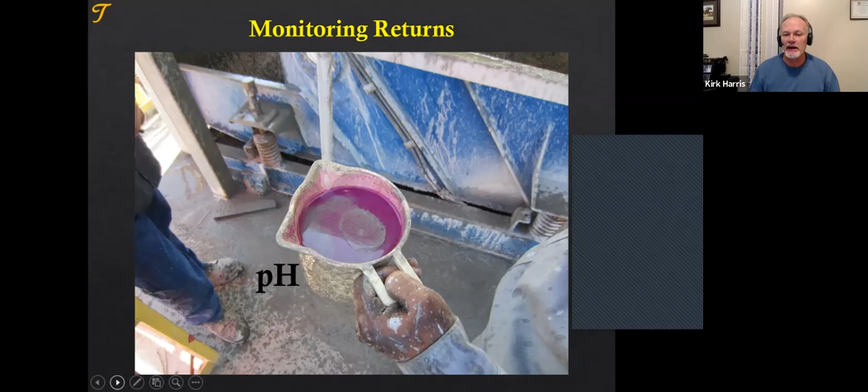We need to be able to recognize when it's cement returns. We also can weigh the densities. I have seen, once we start seeing cement returns, that it takes 50 to 100 barrels before the density starts marching upwards, showing that we have channeling. And if you mark that, and then measure how much displacement before we bump, you get a good idea of how much channeling we're getting. So we can learn a lot from the returns by checking the density.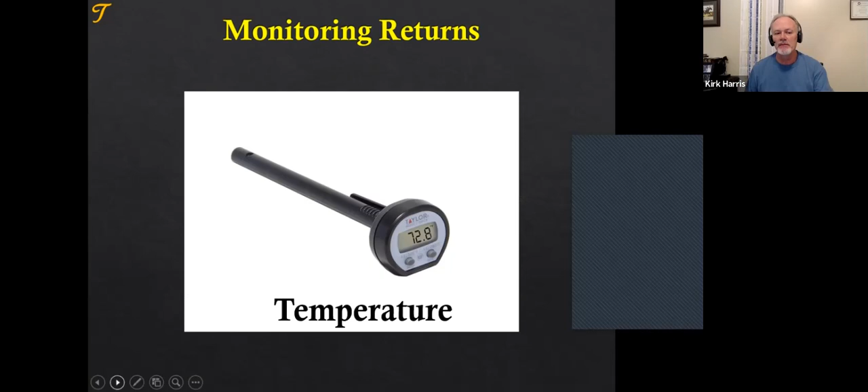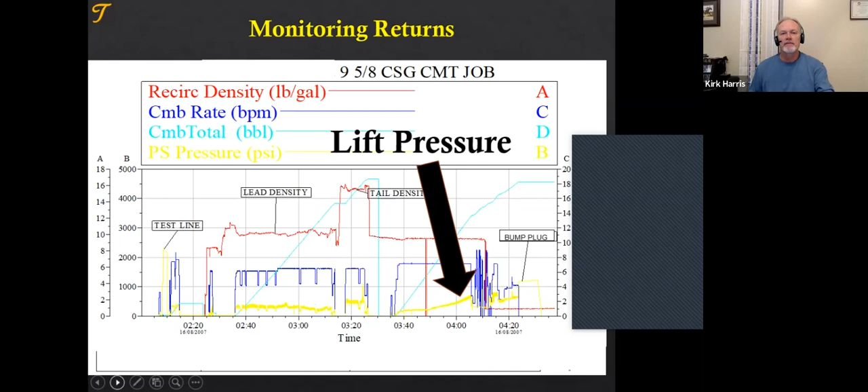We can also check the temperature of the returns. If we know the temperature in and the temperature out, we have great simulators that tell us what our true bottom hole circulating temperatures probably are, so that we can do a better job of designing the cement job. We can monitor the lift pressures, and the final lift pressure will give us an indication of where the cement probably is at. Returns, very important to monitor them.

I'm going to close with talking about what we all do not want to talk about, and that is cementing up the casing. Last time I cemented up the casing, things were going so well on the job. I was actually in Kurdistan, and things were wonderful. It was a perfect cement job. Everything was going, and I remember walking, doing a safety walk, getting back on the truck thinking things are going a little too smooth. And of course, we ended up cementing up the entire liner.

Here are the key reasons that I've experienced of why we flash set cement or we cement up the casing, which no one wants to do.

Formation pack off is maybe the number one reason that we cement up casings. The cement is often blamed, but often it's the formation pack off. Floats being plugged by LCM, the bottom plug not opening, we talked about that. Once you shut down, the cement may not want to start up again, so cement sits static too long. We talked about heat retention and cementing up batch mixers.

Cement dehydrating in an air drilled hole happened to me in the Adelaide area of Australia. In Southern Australia, we did not put fluid loss in the cement and we cemented drill pipe in the hole. Especially in the early horizontal wells, we would pick up the cuttings with spacers and at that interface and plug off at liner hangers.

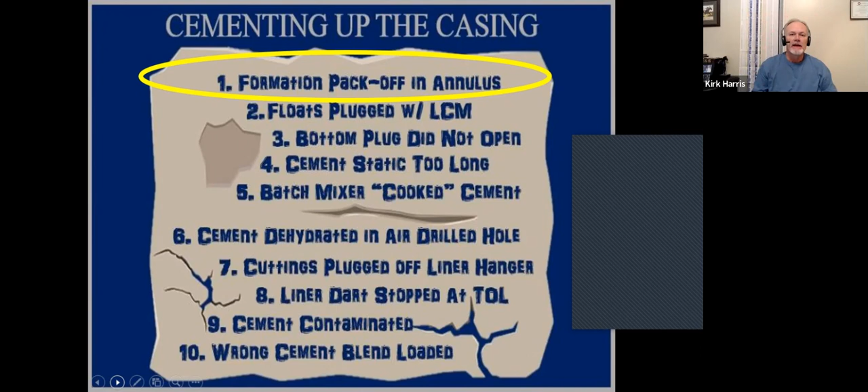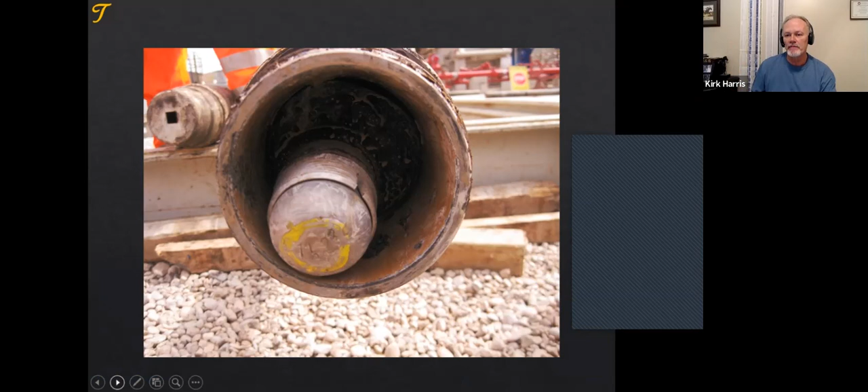Liner dart, take a look at this. The liner dart hit the top of the liner and the job was over. The liner dart was supposed to launch the liner plug and it did not. When we pulled out of the hole, this is what we found in the drill pipe. We found, in our running tool here, we see at the top of the liner, our plug got cocked there, our dart did, and landed on a ledge and it would not go any further. You can see here how it hit and even bent the way it was cocked. So we retrieved that liner dart, cemented up the entire liner.

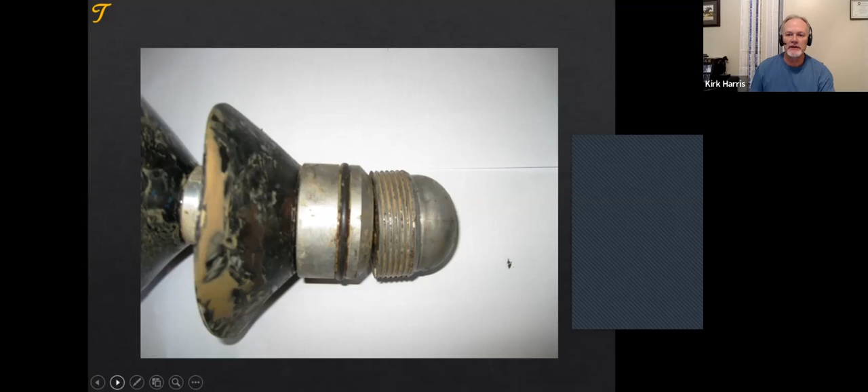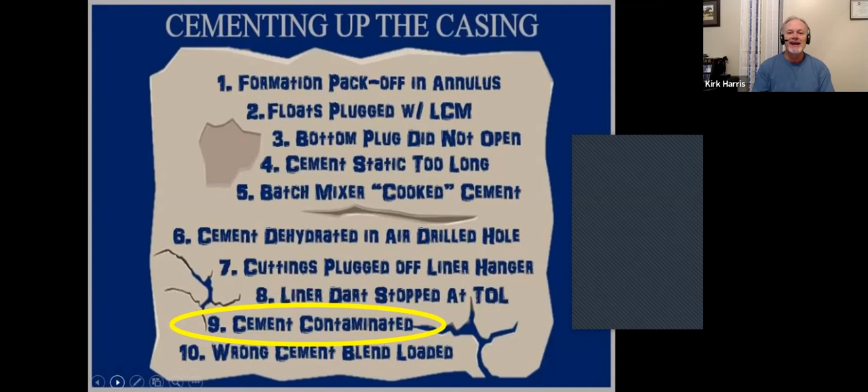And then finally, cement contaminated. I talked about this story, the one in a million, where we picked up some contamination, but it can be contaminated in a lot of other ways. Offshore is one of the big ones, where the cement sits out there for a long time. It's contaminated with moisture. We fluff it ever so often and we inject more moisture into it. That's why we need to blend test, or as we sift, we get fines, or as we road the materials, maybe some of the additives, hollow spheres float out or vibrate out.

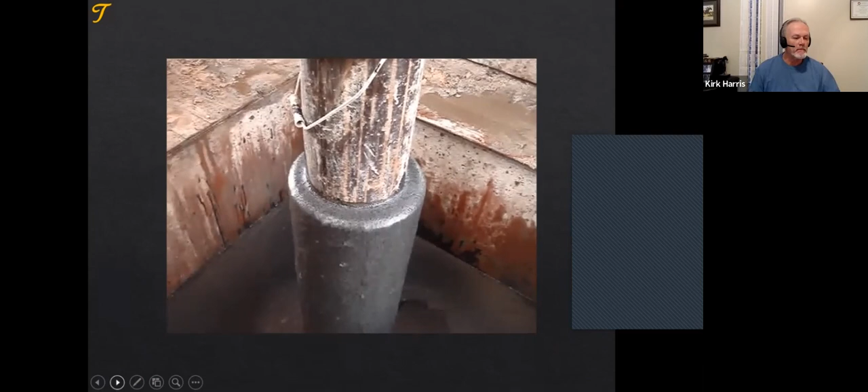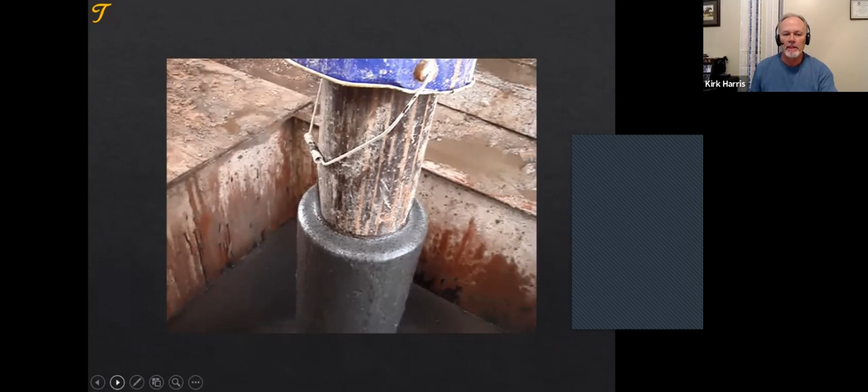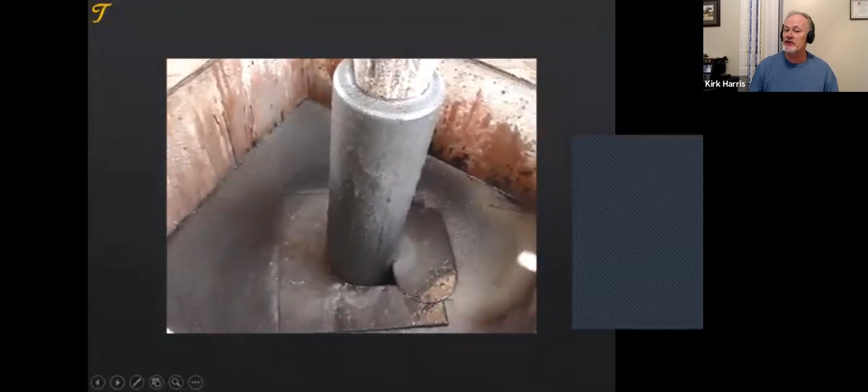I will close by just showing a couple videos from the end of the job. In this case, after the job, the cement is flowing out of the well. The rig has already left. This occurred because the cement was mixed at the wrong density and never set up. This is a low pressure, low volume well. Eventually we had to re-cement this entire well. The cement just kept flowing out due to poor mixing.

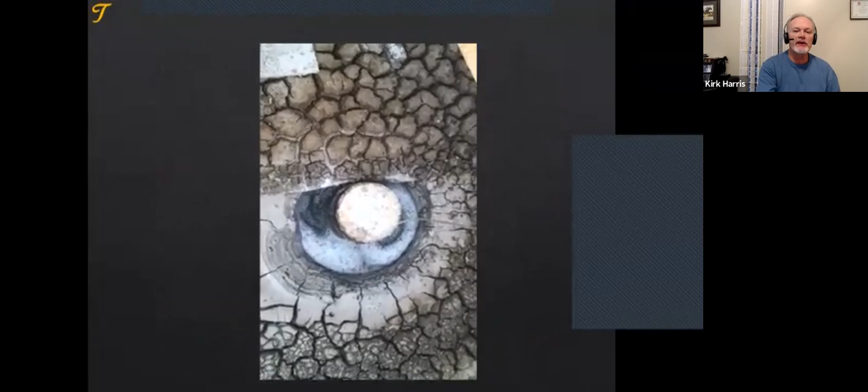What happened here: everything was fine, everything was good until we started nippling down the BOPs. And we had a cement that wasn't setting up very fast. We had a shallow gas zone, and when we nippled down the BOPs, the stress on the casing caused us to start flowing gas between the cement and the casing. We fixed it, but ultimately to fix this we had to abandon the well. So we lost two to three million dollars because we nippled down the BOPs too soon, basically.

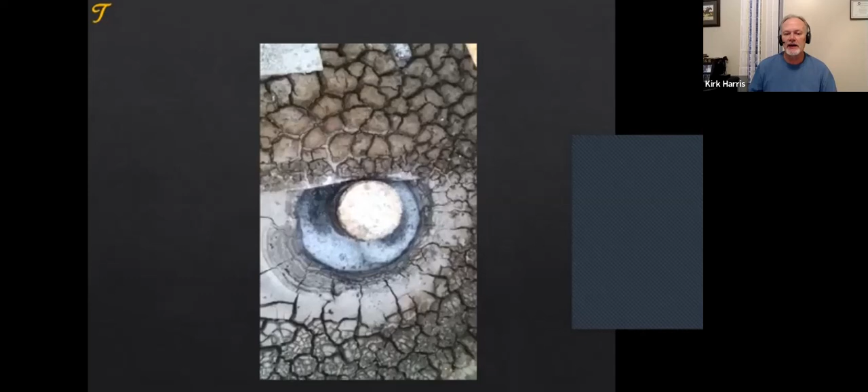So even after the cement job is placed, there are still operations to consider. All of it ties in with the design to get the end result, and that is a nicely sealed well with good integrity. I'll summarize, and thank you so much for attending the webinar.

I'll summarize by saying local cementing practices are key. You need to establish what works for your region. You need to take global procedures and make them work locally. You have your own special considerations. It's attention to detail. The field personnel need to be trained, trained to pay attention to detail.

And you need to partner with your service company. The oil company will have the knowledge and the procedures from the beginning to the end. Sometimes the cementing guys come right in there in the middle of it. You need to partner and work to do the procedures and the operations correctly.